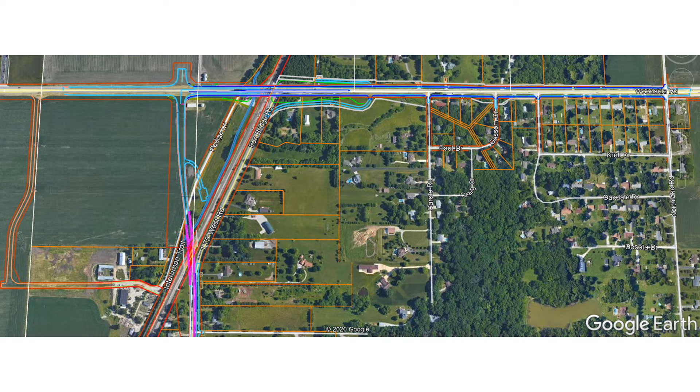This project will be constructed in phases. Phase 1 of the project includes the realignment of Iron Bridge Road. Stage 1 of Phase 1 will relocate the Pedigo entrance.

Existing Pedigo Lane currently acts as a combination road to access residential and commercial property, and also is part of the interurban trail between Woodside Road and this commercial property. When it is relocated to the west, it will only act as an entrance to the residential and commercial properties.

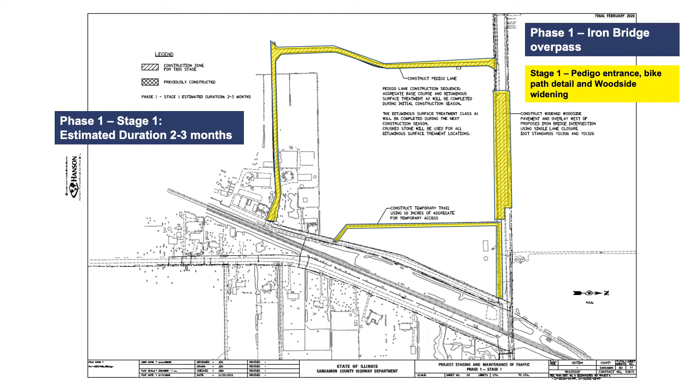In Stage 1, we will also be constructing the detour for the bike path. Stage 1 will also include widening of Woodside Road west of the new intersection location.

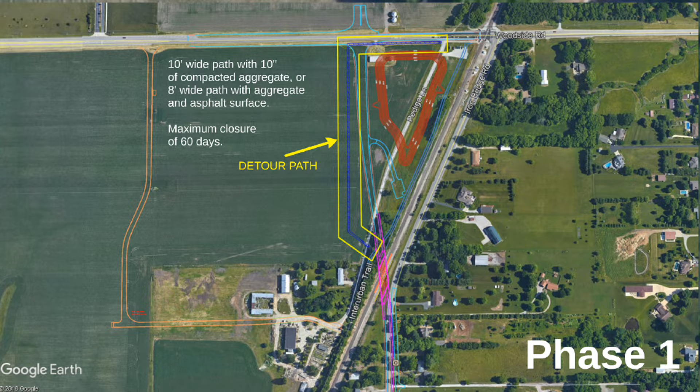The current plans for the bike path detour show a 10-foot wide path with 10 inches of compacted aggregate. To ensure the safety of trail users, this path may be closed for up to 60 days for Phase 1 construction.

Stage 2 of Phase 1 will be split into 2 substages. Substage A will include the construction of a temporary access road for Iron Bridge Road. It will also include the construction of the interurban trail on its new alignment.

Construction for the realignment of Iron Bridge Road will also begin in Substage A, north of the Union Pacific tracks and north of the new roadway bridge. Substage B for Phase 1, Stage 2 will shift traffic onto the newly constructed temporary access road.

We will also begin construction of the roadway bridge, the overpass, and the roadway embankment south of the Union Pacific tracks. This substage will also include the intersection construction of Iron Bridge and Woodside Road and the connection of this intersection to the existing Woodside Road.

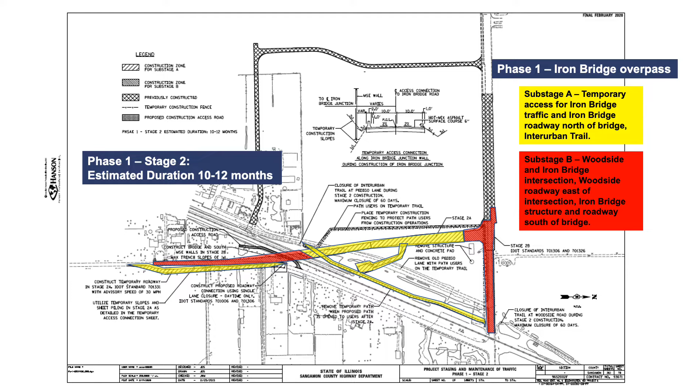Stage 3 of Phase 1 will include the removal of the temporary access road. Traffic will be shifted onto the new Iron Bridge alignment, and the final grading and construction of the shoulders along Iron Bridge will be completed. Once Stage 3 is complete, Phase 1 is complete.

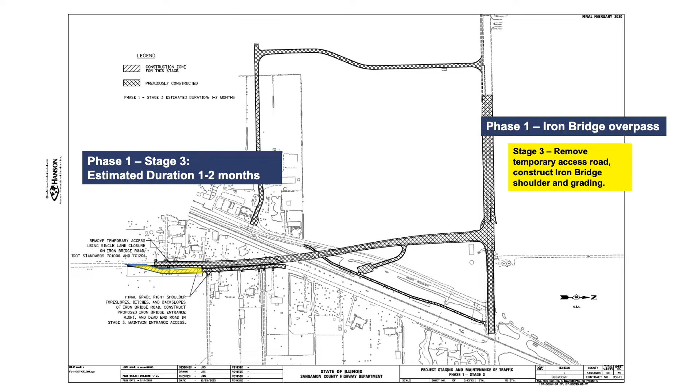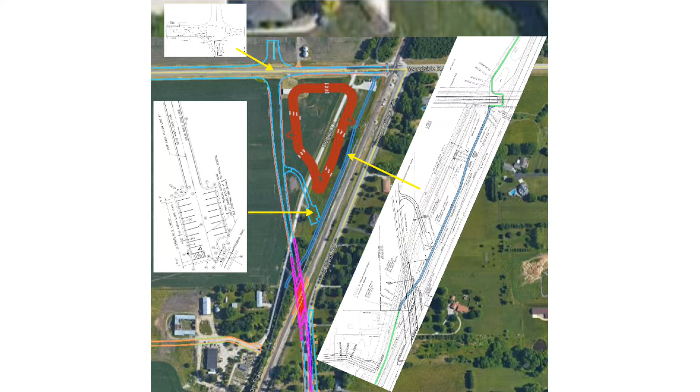When Phase 1 is complete, the intersection of Iron Bridge Road and Woodside Road will be opened. There will also be a new trailhead for the interurban trail that will be accessed off of this new Iron Bridge alignment. Also, the interurban trail will be open to trail users, and it will go through the Iron Bridge tunnel, and it will continue to cross Woodside Road at its existing crossing.

There is a borrow pit that is used for both Phase 1 and Phase 2 of construction. It will be located east of the new Iron Bridge alignment, south of existing Woodside Road, and west of the Union Pacific Railroad tracks. In Phase 1, this borrow pit is used as an excavation area in order to furnish embankment material for the new Iron Bridge roadway embankment.

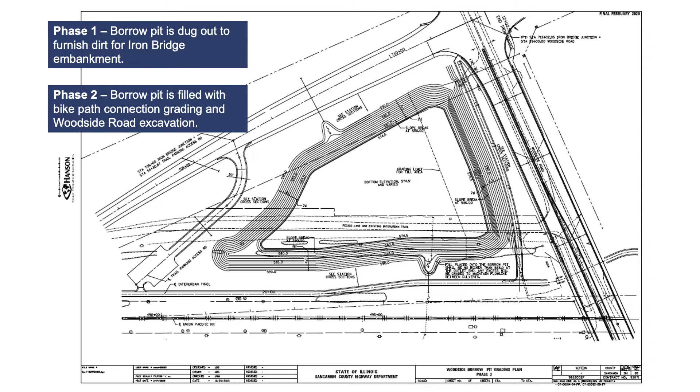In Phase 2, this borrow pit area will be filled back in with excavated material that is taken out of the Woodside Road underpass. Phase 2 of the project will include Woodside Road improvements. Stage 1 of Phase 2 is broken into 2 substages.

The first substage includes the relocation of entrances, and the construction of Woodside access roads. We are also able to start construction of the drilled shafts north of Woodside Road and the temporary shoofly track. Substage 2 will include construction of the bike path detour and the shoofly track south of Woodside Road, and any remaining drilled shafts that can be constructed while traffic is still running on the roadway.

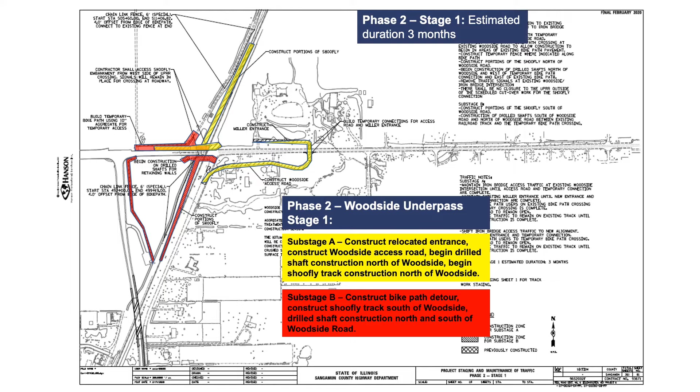The detour path for Phase 2 will also include a 10-foot wide path with 10 inches of compacted aggregate. It will be routed west of the current trail and will connect to the newly constructed intersection. It will then go south along the previously graded borrow pit and connect to the realigned interurban trail at the trailhead. Again, we are anticipating that this detour path and the trail will need to be closed to users for a maximum of 60 days in Phase 2.

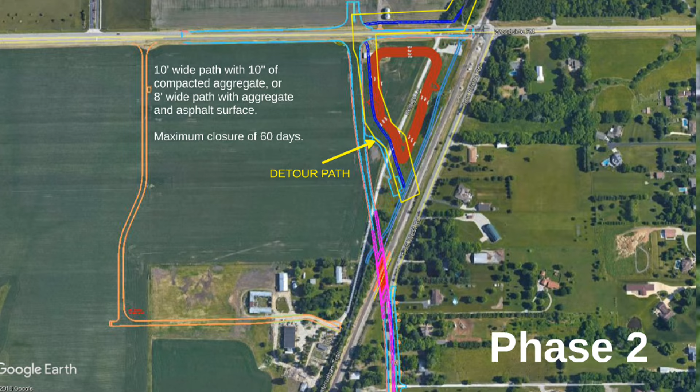Stage 2 of Phase 2 will include the UP constructing the cutover tracks of the shoofly. Once the shoofly is completely constructed, the Union Pacific Railroad will shift their trains onto it. Once rail traffic is shifted, we can begin excavation to the bottom of the bridge abutments, construct the superstructure of the bridges, and put ballast and rail on the new bridge.

Stage 3 of Phase 2 will include complete excavation of the roadway underpass and installation of storm sewer within the roadway. We will also construct the pedestrian bridge and remove the shoofly track.

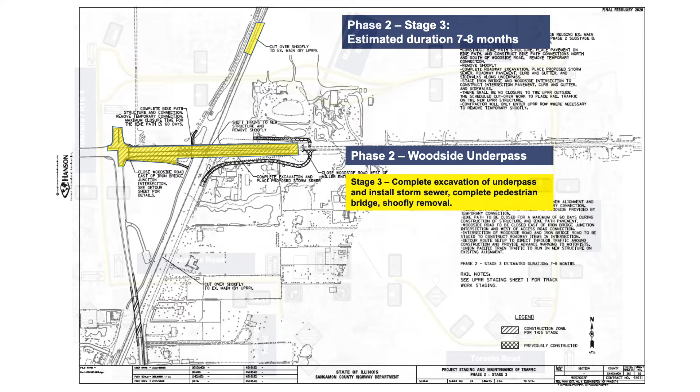During the Woodside Road underpass excavation, we will need to close the roadway to traffic. Because the roadway will be closed, there will be a marked detour route for traffic to get around the construction site. This route will include Woodside Road, Veterans or Route 4, I-72, I-55, and Toronto Road.

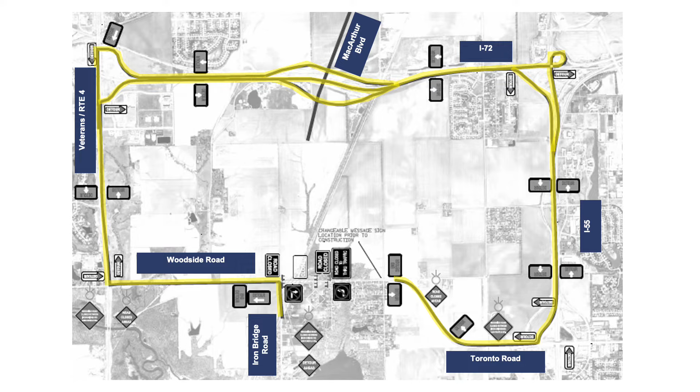Once the Woodside Road underpass is open to traffic, we can begin roadway widening construction of Woodside Road between the underpass and North Lake Road. Traffic will be shifted to the north side of Woodside, and construction will be on the south side, which will include the south lanes, sidewalk, entrances, and intersections.

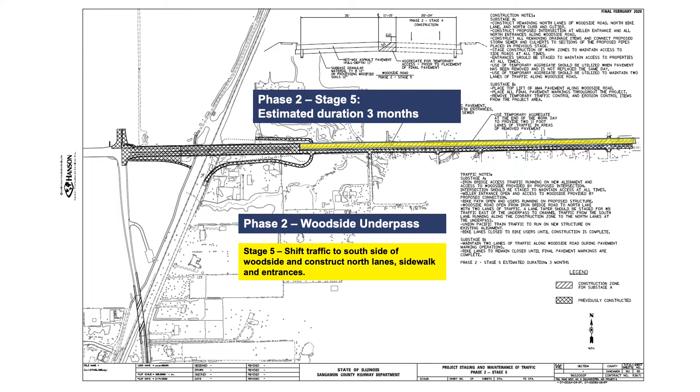Once Stage 4 is complete, we will move to Stage 5, which will include roadway construction on the north side of Woodside Road.

Once Phase 1 and Phase 2 are complete, the project is finished. The roadway network is completely separated from the Union Pacific tracks, and the interurban trail is not in conflict with roadway traffic or rail traffic.

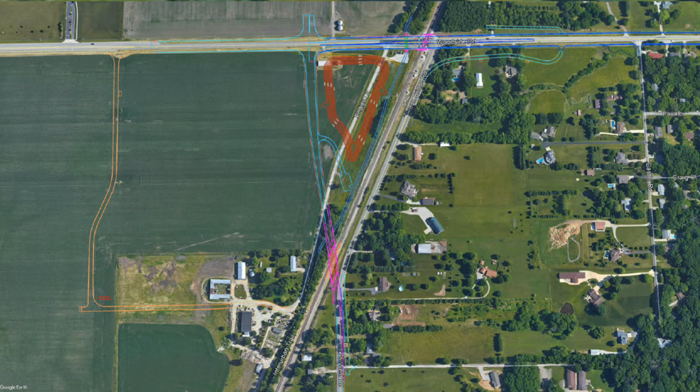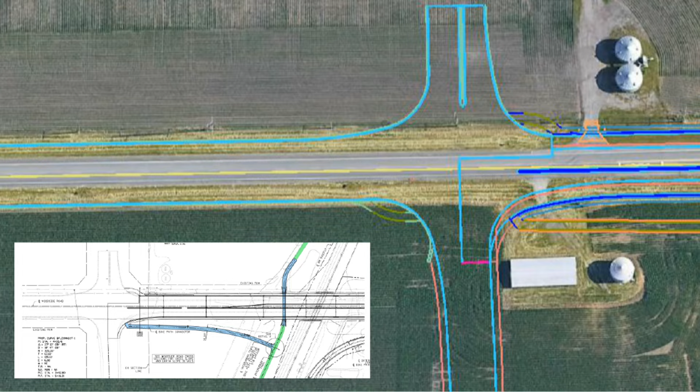With the completion of the project, Woodside Road's on-street bike lanes and sidewalks are still connected to the interurban trail. We will be constructing a bike path pavement connector that is connected to the sidewalks and crosswalks at the Iron Bridge and Woodside Road intersection.

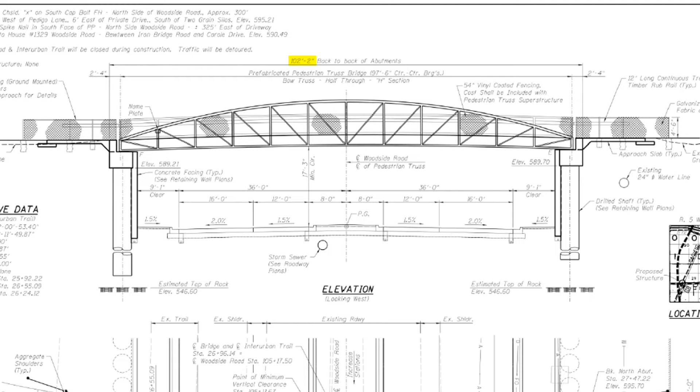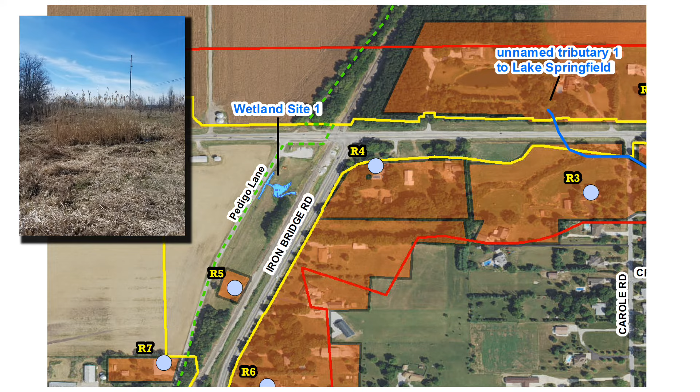There is an unnamed tributary that crosses underneath Woodside Road just west of Carole Road. The image shows what this tributary looks like from Woodside Road.

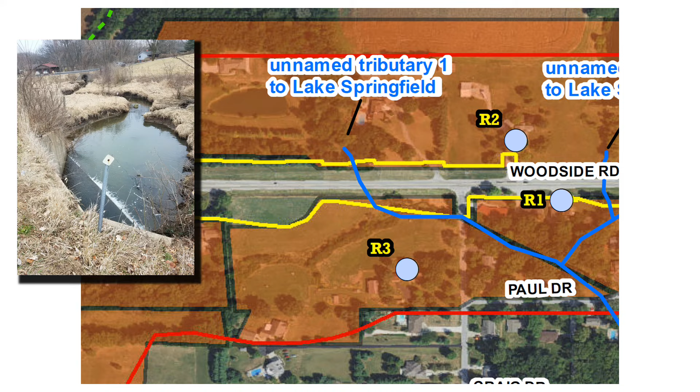There's a second wetland site that is just north of Woodside Road in the figure shown. The image shows what this wetland looks like from Woodside Road looking north.

There are also two tributaries that cross in this area just east of Carole Road, and they cross underneath Woodside Road. The image in the bottom right shows what this tributary looks like looking southwest.

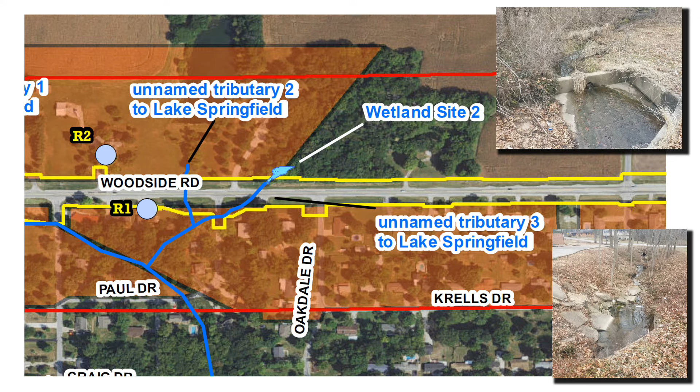This project is scheduled to be on a 2020 IDOT letting, with construction possibly starting in the later months of 2020. Phase 1 is estimated to take 14 to 18 months to complete. Phase 2 is between 16 and 20 months, meaning that the total duration of the project is estimated between 2.5 and 3 years.

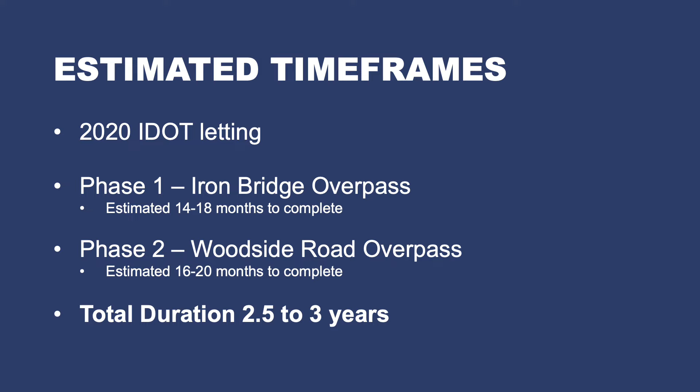Land acquisition for the entire project is nearly complete. All of the property required to construct the Phase 1 improvements have been purchased. Property acquisition is currently underway for the properties needed in the Phase 2 improvements.

Utility relocations have already started. You may have seen crews out in the field the week of April 7th relocating an existing utility pole. You may also see Ameren gas crews out in the field starting the week of April 13th.

Once the Iron Bridge and Woodside Road project is complete, it will create an opportunity for the county to connect MacArthur Boulevard down to Woodside Road. This future connection would be included in a separate project and is not part of the Iron Bridge and Woodside Road project.